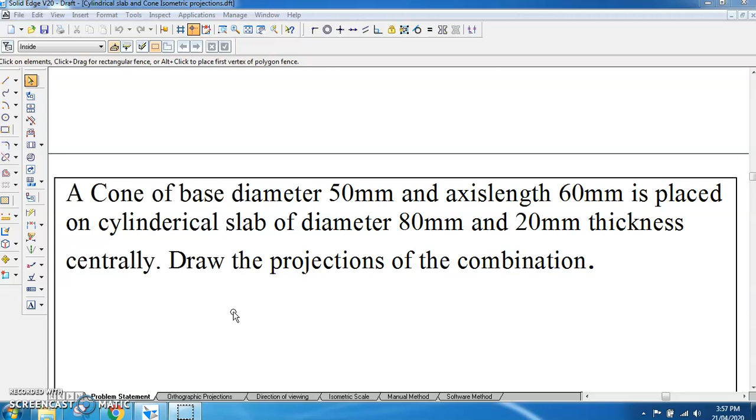Isometric projections of cone and the cylindrical slab using software method. In the previous class we had seen the orthographic projection of this, direction of viewing and enclosing of this, like this. So we'll be having the circle enclosed by the square. If it is circle of 80, it will be enclosed by square of 80. If it is circle of 50, it will be enclosed by square of 50.

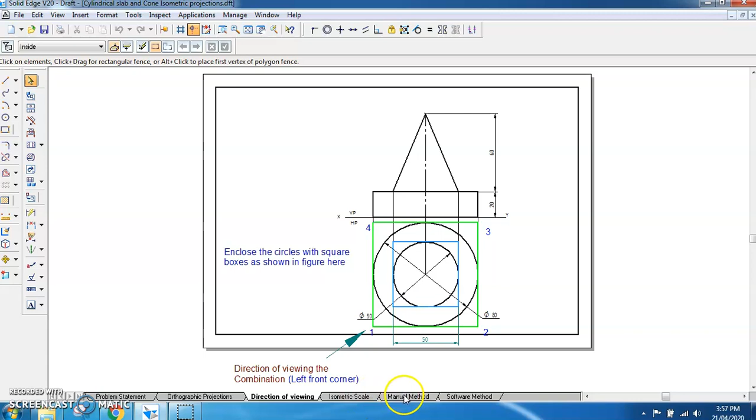Then we had seen the manual drawing here. It is a little bit complex in the software, but when you are drawing it manually you will be able to get all the arcs correctly. So you do try and do it. And now we are going to see the software method.

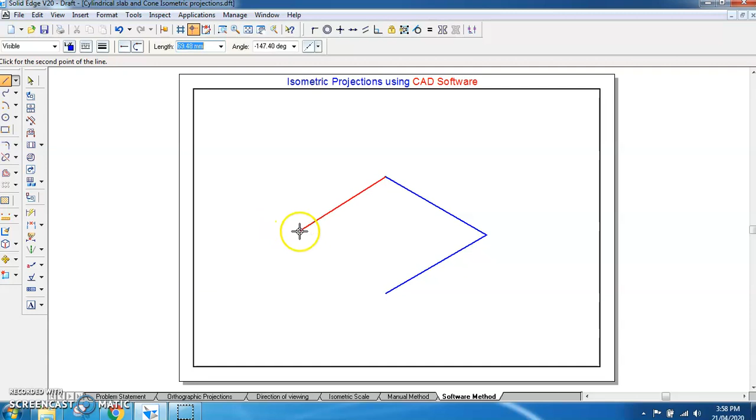In the software method, first we have to start with the square. Get the square that is of 80 mm length. 80 mm, then from here again it is 80, angle is 150, then again 80, angle is 150, and connect it back. So you have got the square here. So this is the square you have got.

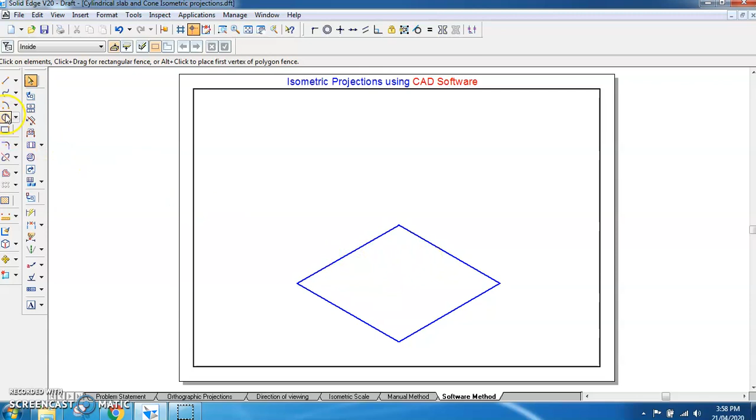Now when you are drawing the isometric projection of circle using the software, you don't have to draw the lines here. Instead you can use the software commands. You go for arc by 3 points. So first one center of this, third one is the tangent. See, and similarly center of this, and tangent. So like this you will be able to get it.

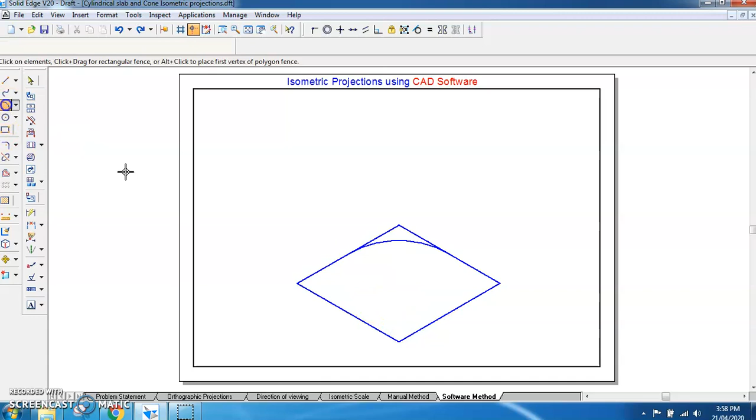You have to click on the correct one, center, and tangent. And similarly again this center, and tangent. Click correctly, or you can click on the end points as well. So like this, on this side also this point, this midpoint, and this tangent. So see, it is ready now.

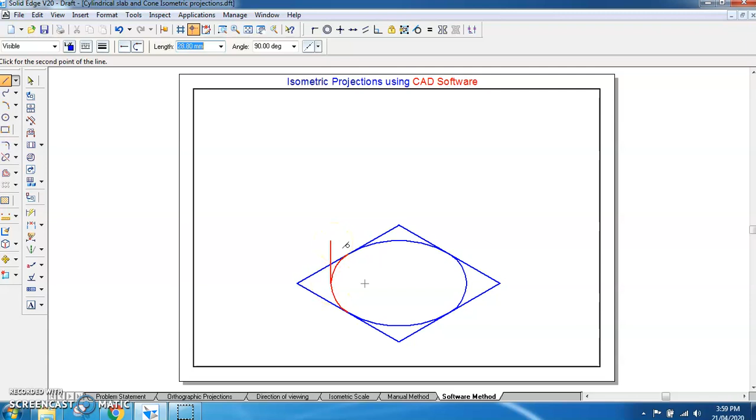Then from this point, see, from this midpoint you have to take it as distance of 20. That is the slab thickness. Then you have to select these 4 arcs, go to move, copy on, lift from this point and place it here. So see, now if you connect from this center to this center, you have got the isometric projection of the cylindrical slab. It is simple when you are doing using software.

Once you do this, then further you have to get another cylinder here. That cylinder circle here, that circle is a circle of cone. Now already you have got this. So this circle you have got, this is of 80. Now you have to make it of 50.

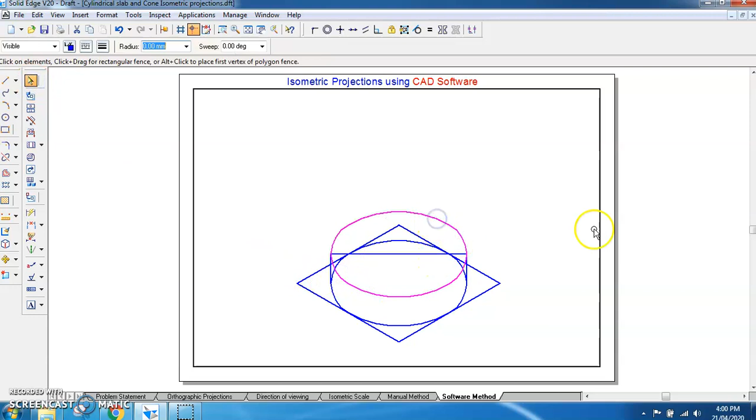First we'll get the center of this. So from here to here we'll get the center. Then we'll select this entire circle or the ellipse, which is the isometric projection of circle. Then we'll go to the scale. We'll have the copy of this from this center. And the scale factor would be 50.

That is the actual dimension of the base of the cone, and we have it as 80, so 50 divided by 80. If you do this, you will be getting this. So this you have to place it at the center. So this cone, what you have got.

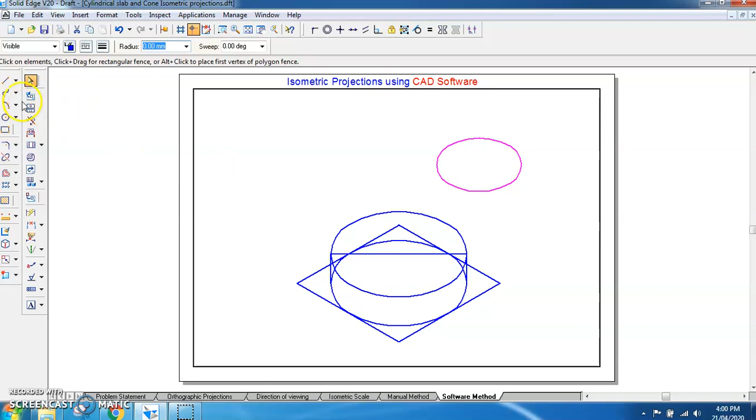So again, if you draw the line of this kind, and if you get the center of this, now you go to move. From this midpoint you place it here. So see, the base you have got it. Once you get the base, you have placed it here.

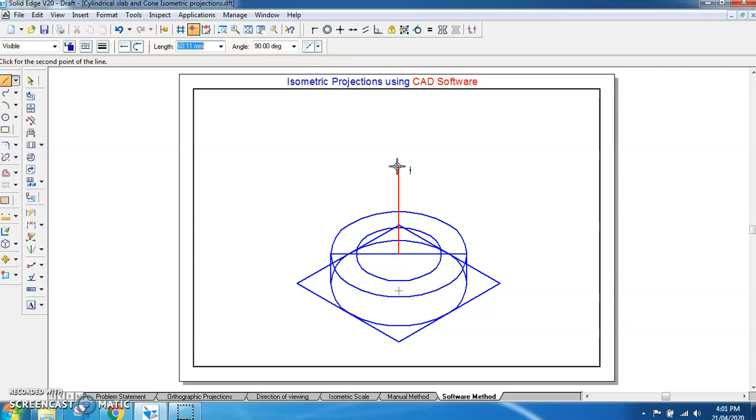Now from the center of this base, what is the height for the cone they have given? That is 60 they have given. Type 60 vertically, and then draw the tangent to this. See, tangent symbol you should get. You will be getting tangent symbol here. Once you get the tangent symbol, click it. Same way on the other side, when you get the tangent symbol, you click.

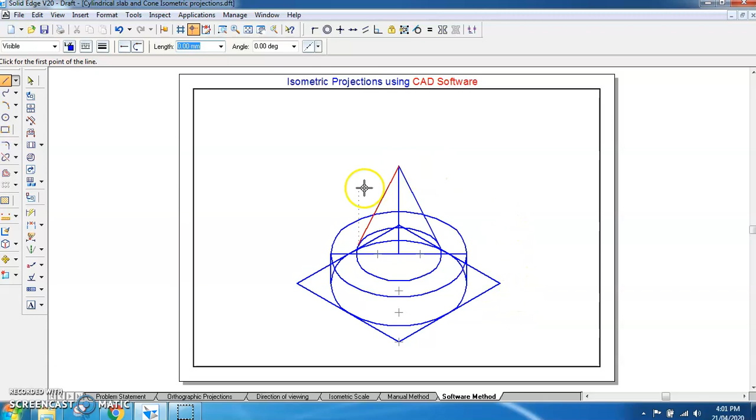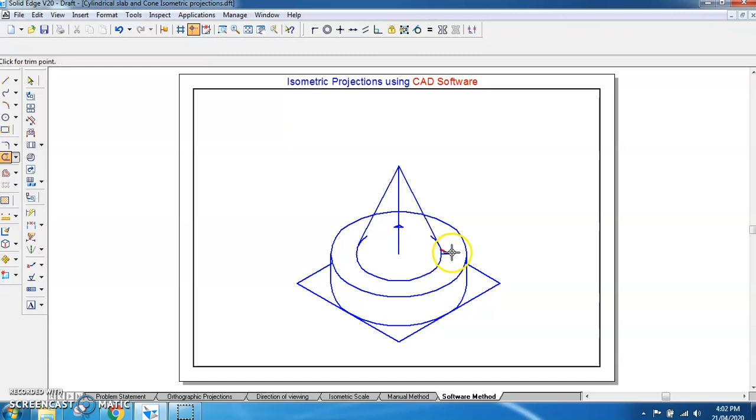So see, this is the software method where you will be having very less number of lines. So further you can trim the remaining lines, and you can keep only the lines which you want. So those lines I'll trim which are not required for us. So all the lines you can trim it off. All these lines are not at all required. Whichever line we don't want, we can trim them off.

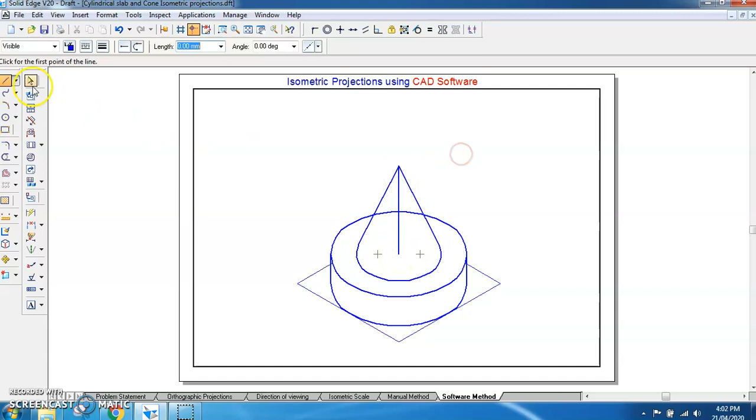This also, if you want to trim it, you can trim it, but let us keep it at least one of the construction lines. We have to choose some of the construction lines. We'll be keeping them as thin lines. Then this line also we don't want, but we can have the axis of this. So somewhere like this we get the axis, and this you can show as a chain type thin line.

So this is the axis and this is a cylindrical slab. For that you have got the cone. So once you complete the things, we have to scale it down first. Select this entire thing, and go to the scale factor using scale command. Scale command you have to use it.

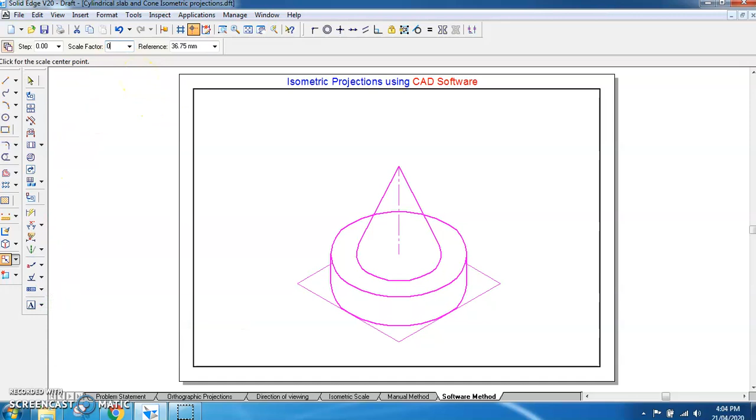So you have to use the scale factor at 0.8164, enter it. It will be scaled. We don't want the copy, just we want to reduce it, just place it, and this is the final solution what you are getting. And if you check the axis, you'll get to know that it is isometric. So this is isometric 60. You have get it and you have completed.

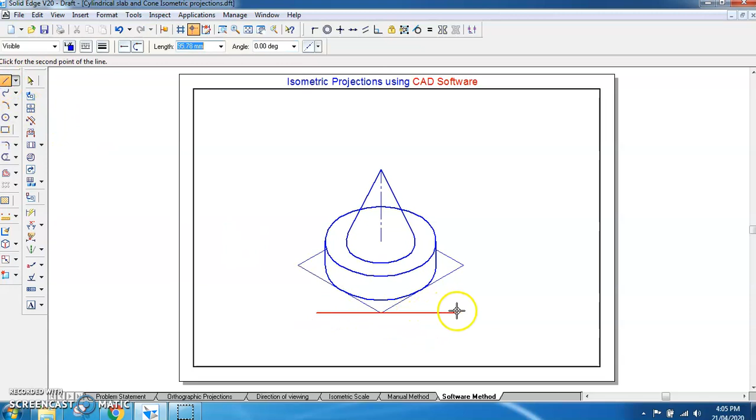So this is the isometric solution using software, and at the end you can show this line with angles with respect to horizontals like this, and you can complete the solution. Thank you.